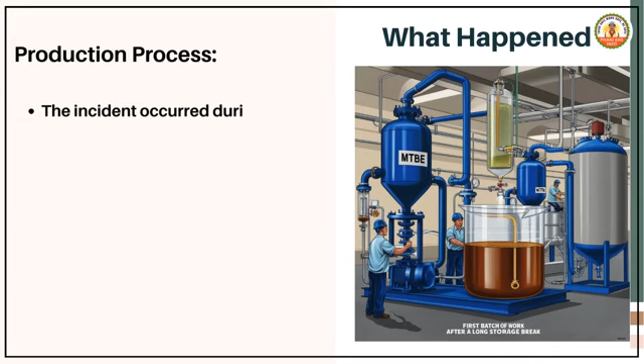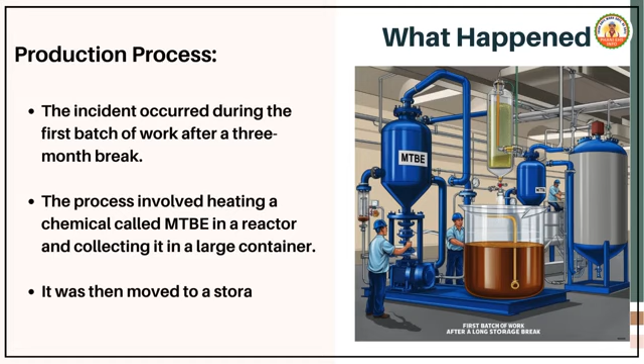What happened? Production process. The incident occurred during the first batch of work after a 3-month break. The process involved heating a chemical called MTBE in a reactor and collecting it in a large container. It was then moved to a storage tank using pressure from nitrogen gas.

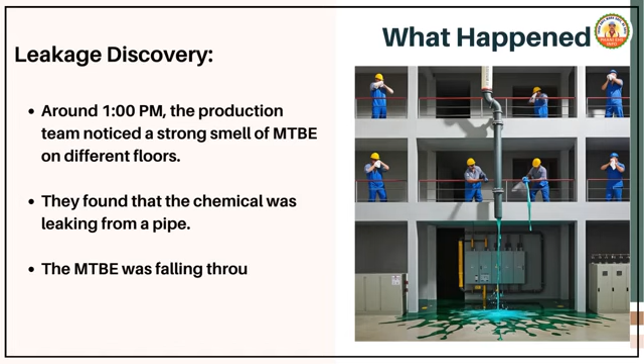Leakage discovery. Around 1 p.m., the production team noticed a strong smell of MTBE on different floors. They found that the chemical was leaking from a pipe. The MTBE was falling through openings in the floor and landing on an electrical panel on the ground floor.

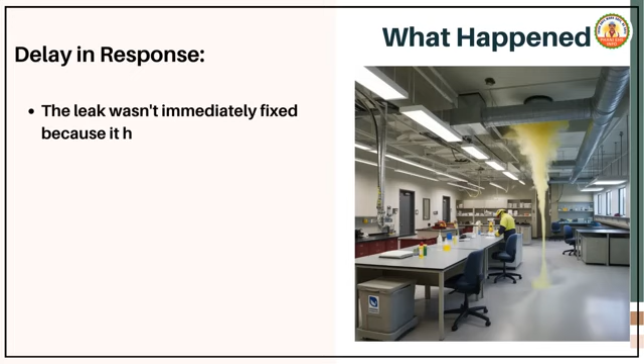Delay in response. The leak wasn't immediately fixed because it happened during lunchtime. During this time, the MTBE vapors spread through the building's air system, which was connected to offices, labs, and storage areas.

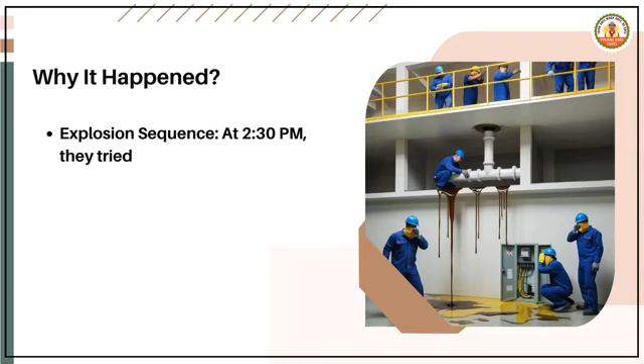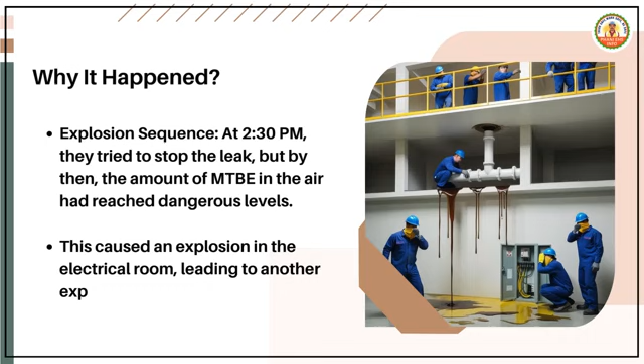Why it happened? Explosion sequence. At 2:30 p.m., they tried to stop the leak, but by then, the amount of MTBE in the air had reached dangerous levels. This caused an explosion in the electrical room, leading to another explosion in other areas connected to the air system.

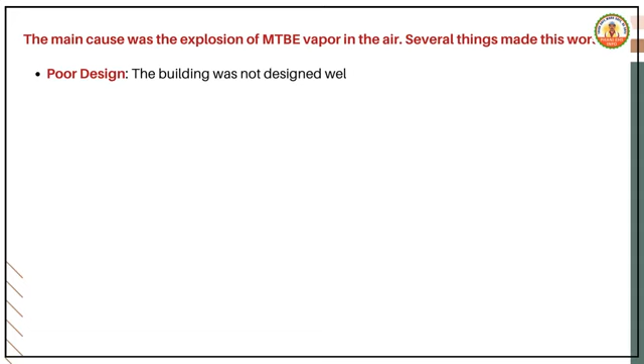Root cause. The main cause was the explosion of MTBE vapor in the air. Several things made this worse. Poor design. The building was not designed well, with process areas connected to non-process areas through the same air system.

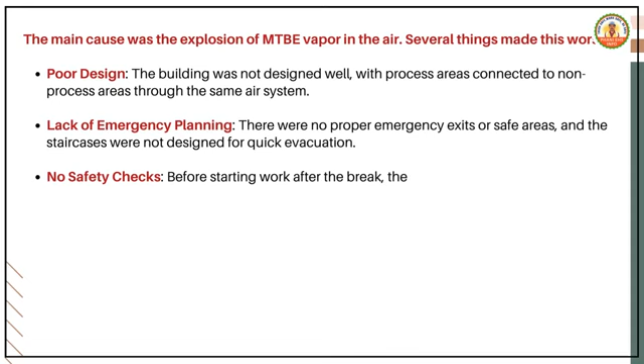Lack of emergency planning. There were no proper emergency exits or safe areas, and the staircases were not designed for quick evacuation. No safety checks. Before starting work after the break, there were no safety checks done. Unsafe equipment placement. The pipes carrying the solvent were placed right above the electrical panels, which allowed the leak to fall directly onto them.

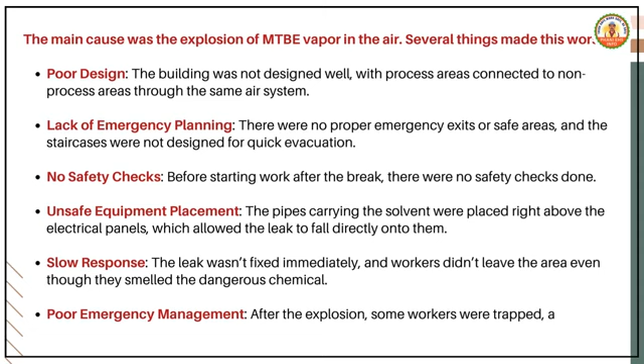Slow response. The leak wasn't fixed immediately, and workers didn't leave the area even though they smelled the dangerous chemical. Poor emergency management. After the explosion, some workers were trapped, and there was no proper way to check if everyone was safe.

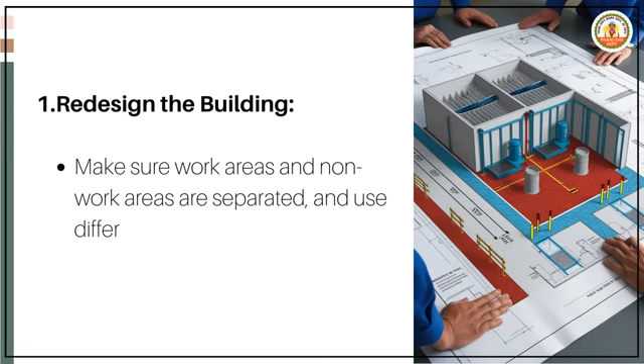Recommended actions. To prevent this from happening again, here are some actions we should take. Redesign the building. Make sure work areas and non-work areas are separated, and use different air systems to prevent the spread of dangerous vapors.

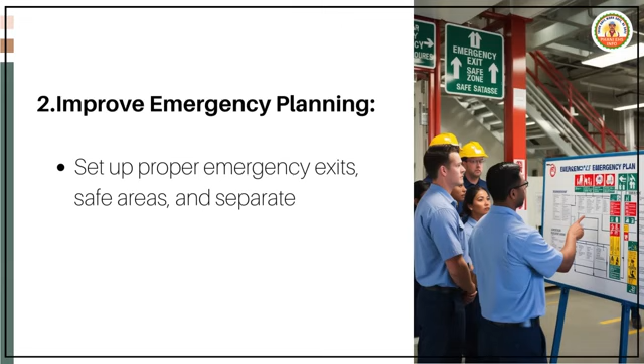Improve emergency planning. Set up proper emergency exits, safe areas, and separate staircases. Train everyone on what to do in an emergency. Do safety checks. Always do safety checks before starting any new work, especially after a long break.

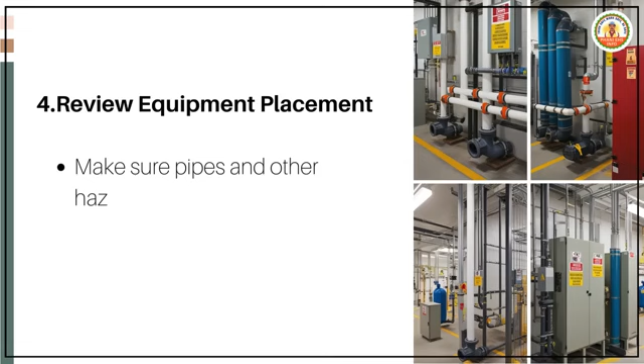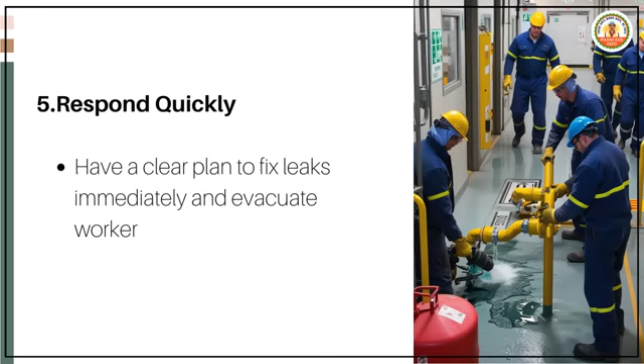Review equipment placement. Make sure pipes and other hazardous materials are not placed above electrical panels or other sensitive areas. Respond quickly. Have a clear plan to fix leaks immediately and evacuate workers if there's any sign of danger. Better emergency management. Set up a system to quickly gather everyone in a safe place and make sure everyone is accounted for.